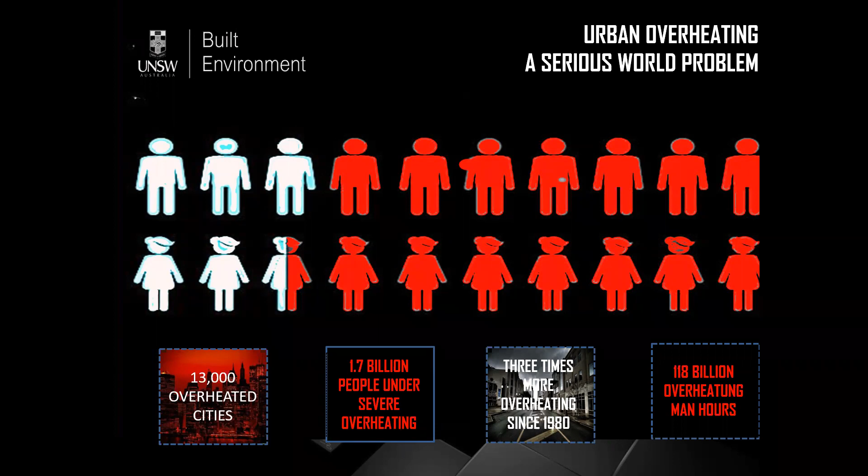Regional climatic change together with global climatic change are among the most important environmental problems we are facing today. What is urban overheating? It has to do with the higher temperatures in specific parts of the city, usually in the areas with higher density, higher anthropogenic heat, and higher solar radiation absorbed and stored there. This is a very documented phenomenon - the most documented phenomenon of climatic change.

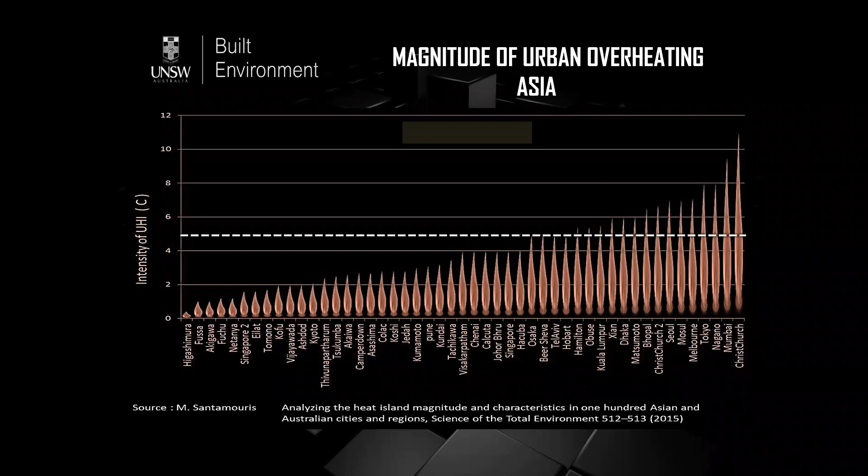Do we have enough evidence and proofs about regional climatic change? Of course. There are more than 450 cities where experimental data are available. I'd like to show you data from Asia and Australia, where you can see that the average magnitude of urban overheating is close to 5 degrees, but there are cities which present an overheating magnitude over 10 degrees. So it is a very well documented phenomenon.

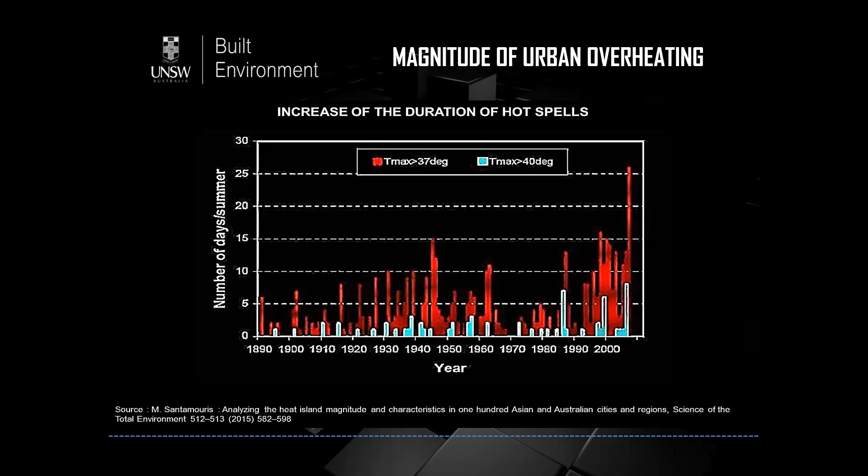Unfortunately, it's not just the increase of the temperature in our cities - it is much more than that. It has to do also with the increase of the duration of hot spells. If we try to plot the hot spells above 37 degrees, the red bars, or above 40 degrees, very serious hot spells, the blue bars, you will see that during the very last years, there is a tremendous increase of the hot spells. But it's not just the increase of temperature and duration of hot spells - unfortunately it's more than that.

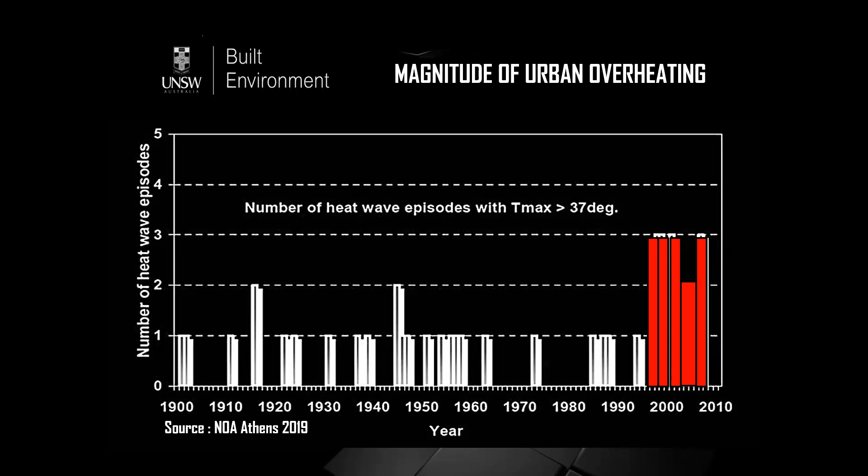It has to do also with the increase of the magnitude and frequency of urban overheating. If we plot, for example, the number of heat waves with temperatures above 37 degrees during the last 100, 120 years, you will see that during the very last years there's a tremendous increase of the frequency and also the magnitude of heat waves. So urban climatic change has to do with the increase of temperature in our cities, the increase of the duration of hot spells, and also the increase of the magnitude and frequency of heat waves.

Once this is defined, then we really have to understand the characteristics of urban overheating.

It's not so simple. You can say, for example, that the temperature in the city is 5-6 degrees higher than in the surrounding, but this is not enough really to understand the science and the engineering of the problem and propose solutions. So we need really to go in depth, understand the phenomena, and at the same time have a very good knowledge and plan all possible solutions to face the problem.

This can be done through experimental techniques or through numerical techniques. Numerical techniques, which have been developed really during the very last years, for example mesoscale modeling, allow us to have a very good understanding.

Once we understand the reasons and the characteristics of urban heat island, then we can plan our solutions and our response to the problem. If we don't understand it and we face the problem, or plan based on empirical knowledge, I'm afraid that we don't have results.

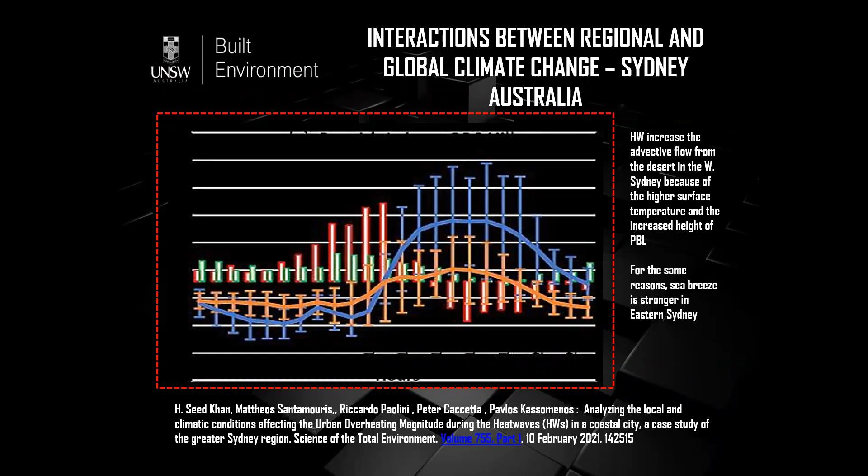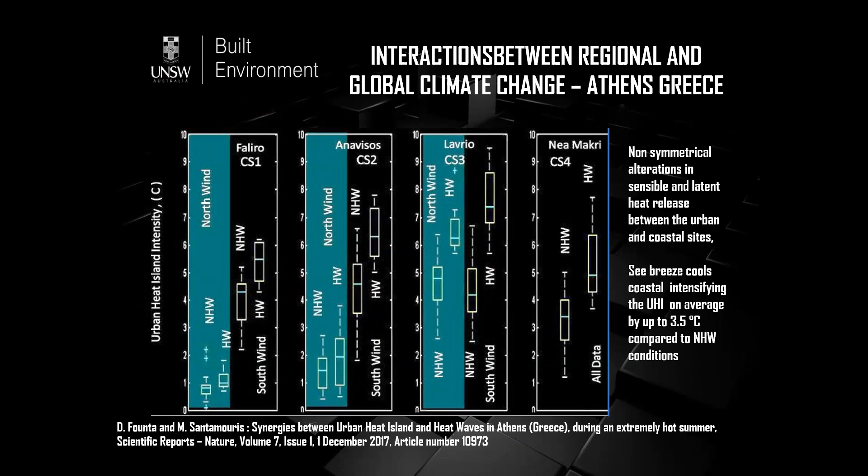The same happens, for example, in Athens, Greece. You can see the magnitude of the urban heat island in specific parts of the city during the non-heat waves and during the heat wave. You can understand that it is much, much higher during the period of heat waves. So this is a serious problem, given that we expect a tremendous increase of the frequency and also of the magnitude of heat waves in the future.

What about the impact? Of course, higher temperatures in our cities may have a very specific impact on energy, may increase the energy consumption for cooling, for example, may create a serious problem on thermal comfort, may increase the concentration of pollutants, may have an impact on health, heat-related mortality and morbidity, may affect the economy or the sustainability and vulnerability of the population.

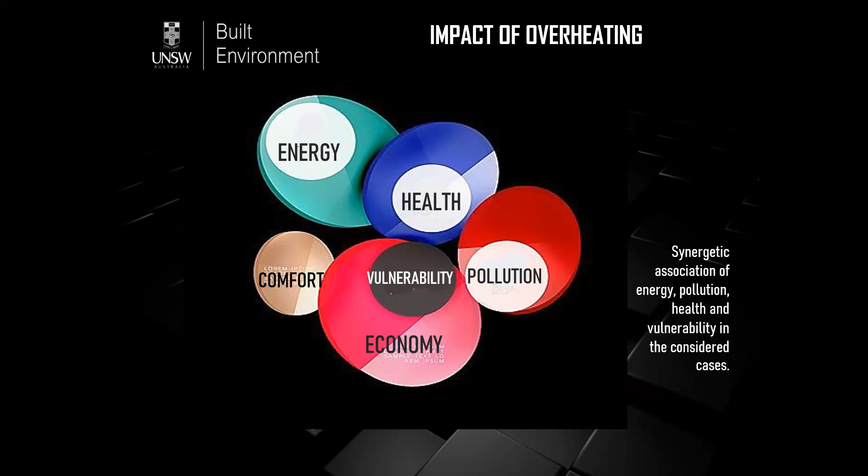Do we have enough evidence and knowledge about the real impact? Yes. During the last 10, 15 years, we have collected a lot of real experimental data that document really the impact of urban overheating on our life.

Let's start with energy. Urban overheating is affecting really the energy supply and the energy demand. How is it affecting the energy demand? It is evident: higher temperature means higher demand for cooling. And this means, of course, that perhaps we may have less energy for heating, which is not exactly the case.

On the other hand, urban overheating is affecting very much the energy supply. Why? Because it increases the peak electricity demand. So it obliges utilities to build additional power plants to satisfy the additional demand during some days or some weeks per year. This increases tremendously the cost of electricity, because power plants have to operate just for some days per year, and this means that they have to be maintained during the whole year, which increases the cost.

On the other hand, we have a lot of power disruptions. We have higher demand during the peaks. We have increased losses and many other things.

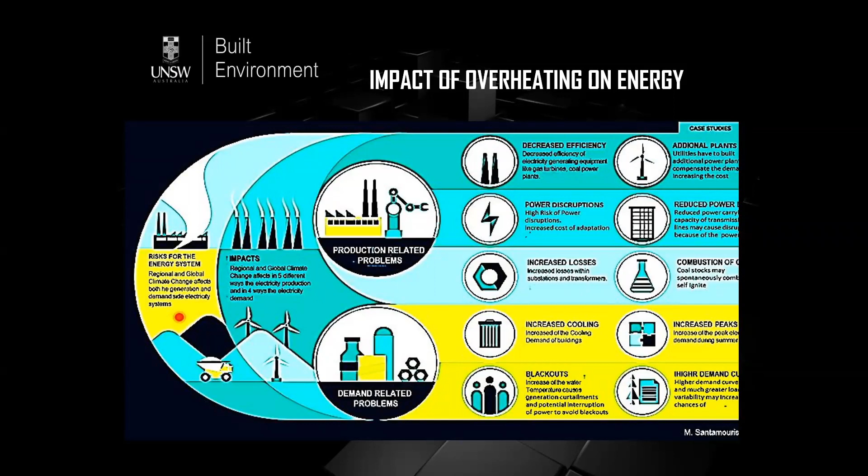Let's try to be a little bit more quantitative. Do we know how much is the energy increase because of the urban heat island? Yes. By collecting data from more than 100 cities around the world, the average energy penalty per square meter of cities is close to 2.3 kilowatt hours per square meter. Or if you like, the energy penalty per square meter of city and per degree of temperature increase is 0.7 kilowatt hours per degree and square meter.

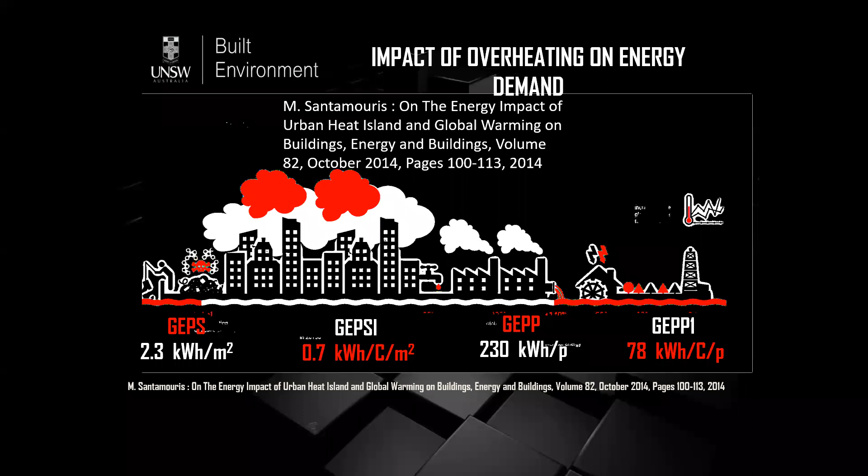If you like to report it per person, it is close to 230 kilowatt hours per person per year. And if you report it per person and degree of temperature increase, it is 78 kilowatt hours per degree and person. Of course these values may change from city to city, but these are the average values we have collected.

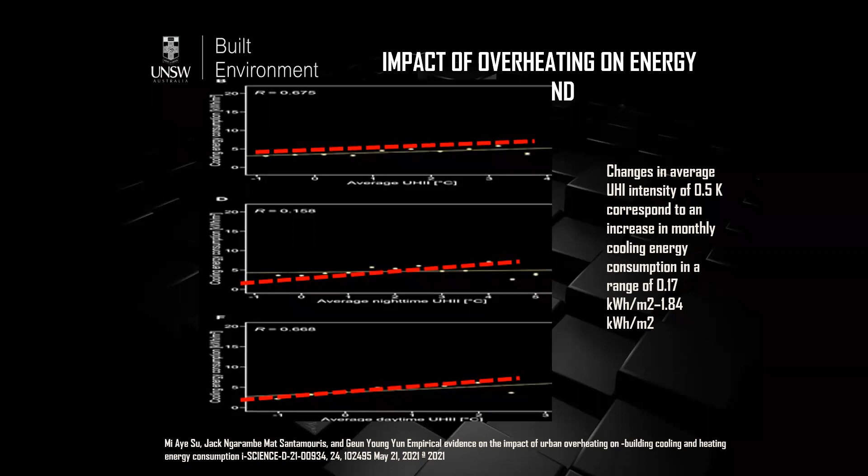A very recent study we performed together with colleagues in Korea, following this lecture, looked at the real energy consumption of buildings associated with real overheating in Seoul. It showed that because of the overheating, the energy consumption for cooling was up to 1.8 kilowatt hours per square meter higher than other buildings. So there is a very important penalty imposed on our buildings because of urban overheating.

This brings us to the major problem we may face in the future: the energy consumption for cooling. How much is the energy consumption for cooling in our days? Very low, not so high. Heating is the main energy consumption.

But what about the future? Which are the drivers that increase energy consumption? First, the increase of temperature. Second, the increase of population. Third, the tendency to increase floor area per person. We also have to consider that in the future we may have air conditioners of higher efficiency, and also buildings of higher efficiency.

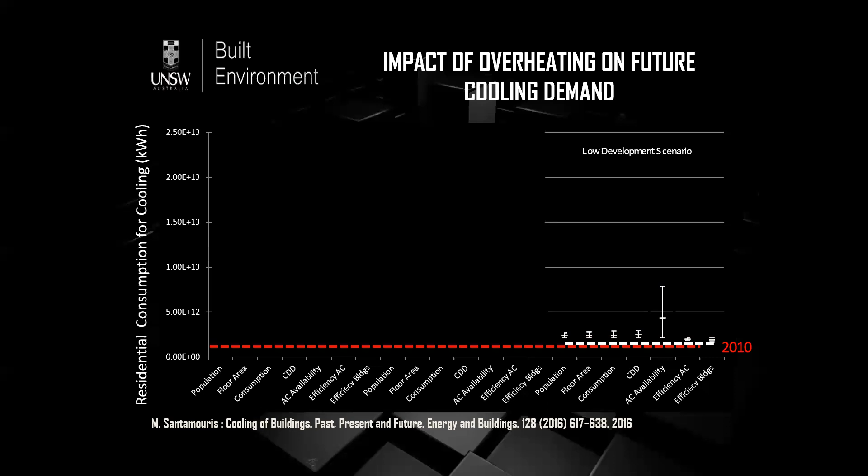When all these parameters are taken into account, considering a low development scenario for 2050, the increase of cooling demand will be on the order of 320%. But once we consider an average development scenario, which is more probable, the increase of cooling demand will be as high as 750% compared to 2010.

In case we have a very high development scenario, the increase will be on the order of 2,270%. When uncertainties are taken into account, these numbers really skyrocket, and we may have a tremendous energy increase for cooling. According to recent studies, just one city, Mumbai in India, may present in 2050 higher energy consumption for cooling than the whole United States.

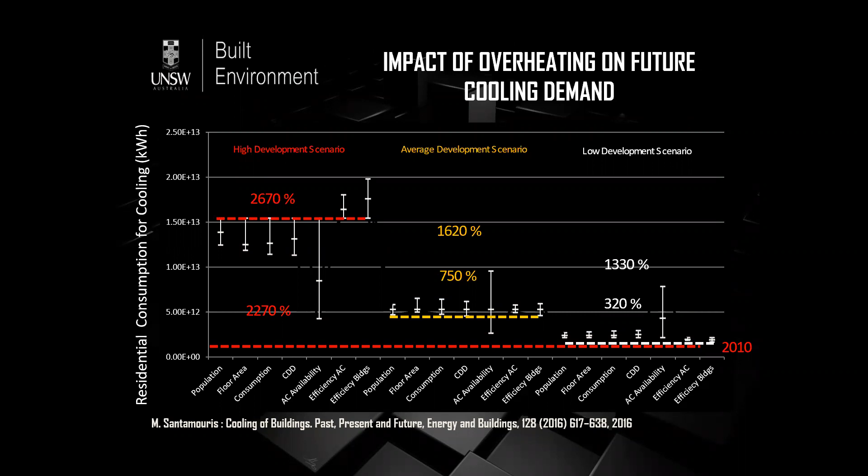You understand the implications associated with such a high demand for cooling: which kind of sources we will use, how many new power plants, which kind of fuels we will use, what about pollution, what about emissions, what about the cost, and all these specific issues.

Apart from the energy impact of urban overheating, higher temperatures in our cities have a serious impact on air pollution, mainly on the concentration of atmospheric ozone. Ground level ozone is a toxic gas, a killer. Almost 87% of episodes of high ozone concentration are because of urban overheating.

We know it's accepted to live under 110 units of ozone, which in my opinion is quite high. But unfortunately, in our cities we have more than 300 units of ozone, which is very high, three times higher than the threshold.

A recent study collecting data from about 100 Chinese cities showed a tremendous increase of ozone concentration during the last years. Unfortunately, the forecast for the future shows a tremendous increase of ozone because of future developments. This increase may be as high as 400%, I hope not, or as low as 20%, but it will be really high. So a serious problem associated with urban overheating has to do with the concentration of ozone.

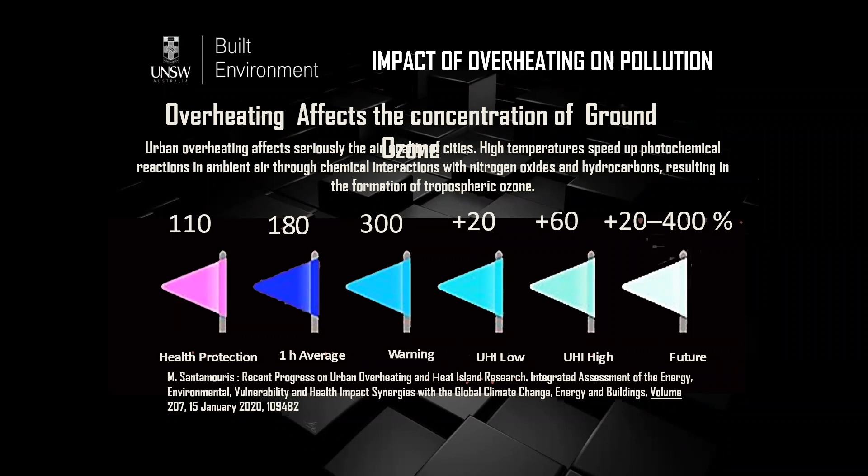But it's not just that. We know very well that during high temperature periods, emissions from power plants, especially thermal power plants, increase by about 3% per degree of temperature increase. So because of the increase of temperature, we have much higher emissions from power plants.

So there is an important impact of urban overheating on energy, and an important impact on environmental quality. But in my opinion, one of the major problems associated with urban overheating has to do with the vulnerable population, low-income population. We know very well that low-income population lives in houses of low quality, not well protected, and because of that, they are the first victims of urban overheating.

Do we have enough studies that show the impact of urban overheating on vulnerable population? Yes. During the very last years, there have been a lot of studies, experimental studies performed.

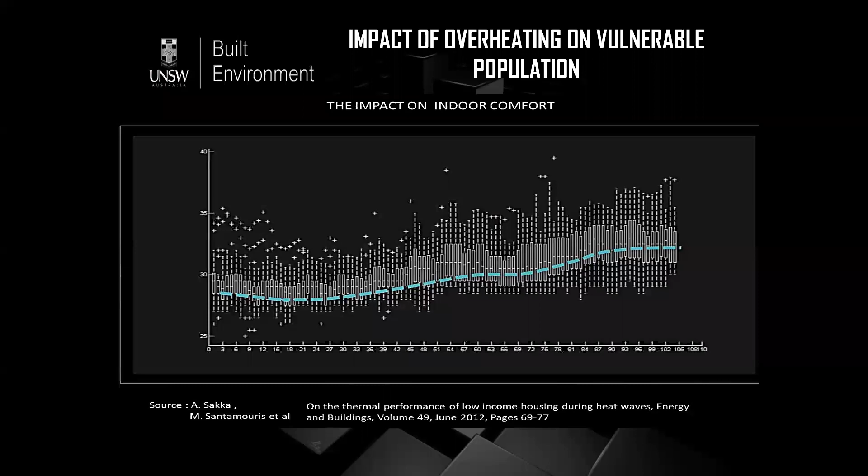I'd like to show you a study we performed 10 years ago in Athens, Greece, involving about 400 low-income houses during a heat wave. You see the evolution of the indoor temperature. Before the heat wave, indoor temperature was about 27 degrees, no problem. At the end of the heat wave, 5 days later, average indoor temperature was 33 degrees. We have more than 3 days with temperature above 35 degrees in many buildings, and many buildings presented temperatures close to 38, 39 degrees.

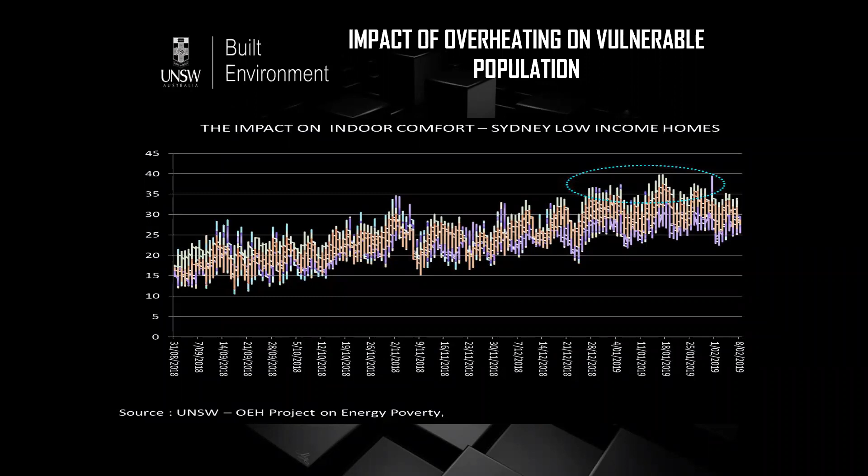This brings us to the more important problem associated with urban overheating: the problem of health. Heat-related mortality increases above the threshold temperature. This is very well known. Is it so simple? No, it is a very complicated relation. It's not a linear or easy deterministic correlation between the threshold temperature and heat-related mortality.

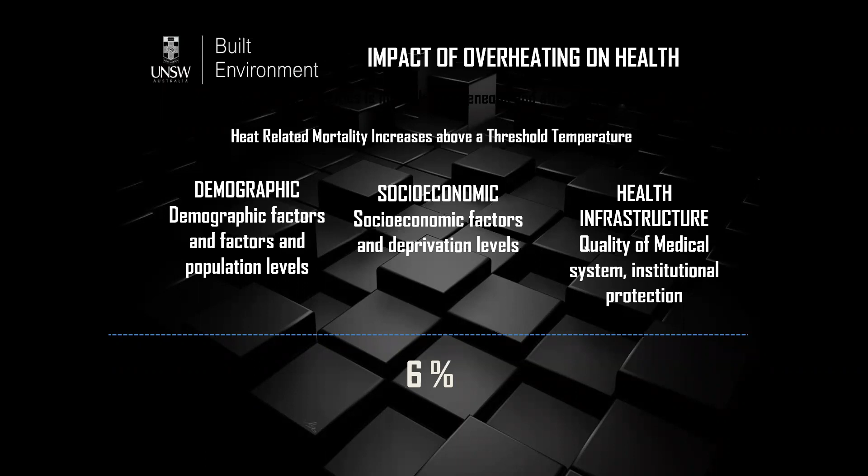Why? This has to do with our adaptation. So all those who say overheating is good for us in the north because we may have higher temperatures don't really take into account that this may affect mortality and health problems in the area.

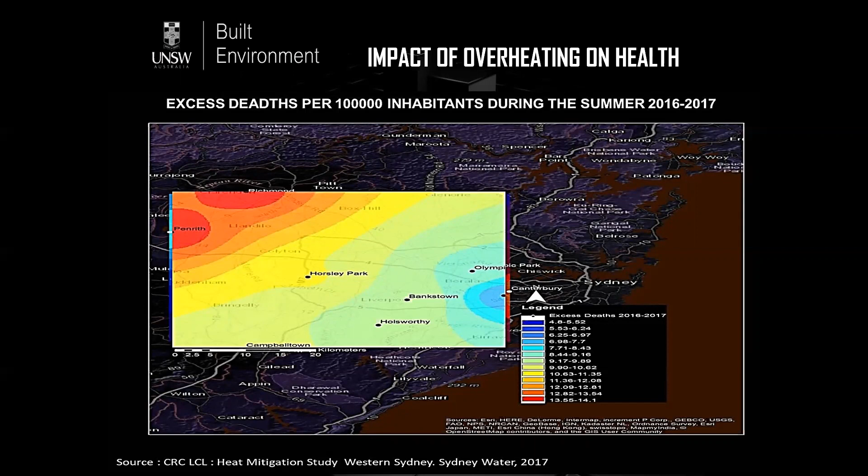What happens in Sydney, for example? We have performed studies trying to associate heat-related mortality with overheating in Sydney. I'd like to show you the distribution of heat-related mortality in the city of Sydney during the period of 2016-17, where we had more data. You can see that in the northwestern part of the city, where temperature during summer is up to 9 degrees higher than in the eastern, coastal part of the city, heat-related mortality per 100,000 people is almost 3 times higher than in the coastal area. So there's a tremendous increase of mortality, a tremendous penalty imposed on the local population because of heat-related mortality.

But it's not just the outdoor environment that affects mortality; it also has to do with the quality of the indoor environment. A recent study performed in London by UCL showed that while the risk of mortality because of outdoor overheating is 6.1 deaths per million, when this is associated with low quality of the indoor environment, it increases by a factor of 4, up to 23.5. So once we really discuss and study the problem of overheating on health, we have to consider, in parallel and in a combined way, the quality of both the outdoor and the indoor environment.

This was the second part: what happens regarding the impact of urban overheating on energy, environment, survivability, and health. These are the bad news. Do we have good news? Yes. During the last 10 to 15 years, we have made tremendous progress regarding mitigation.

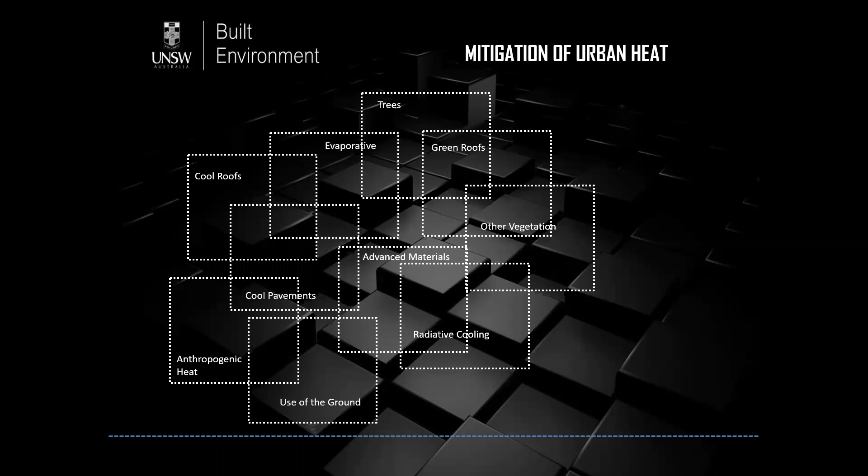We have made tremendous progress in developing technologies and knowledge to decrease the temperature of our cities. We have developed a lot of new technologies, for example evaporative cool roofs, vegetation, and many new mitigation strategies that have been implemented and tested in many cities. So we have a lot of knowledge about the efficiency of these mitigation technologies.

I will concentrate on two specific technologies: mainly the use of materials, and second, the use of greenery.

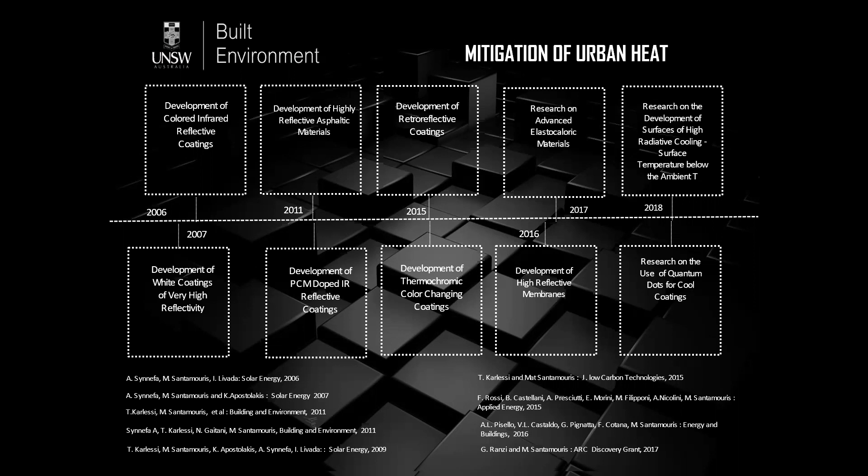During the very last years, regarding materials, there has been development and implementation of materials in cities which may decrease the temperature of the urban environment, and these materials really contribute tremendously to decreasing the temperature. I'd like to present the progress we have made regarding these materials.

But before presenting the efficiency and characteristics of these materials, I'd like to tell you that in very recent years we have made tremendous progress in understanding and documenting urban overheating. We have new techniques using UAVs, drones, and many other techniques to map urban overheating.

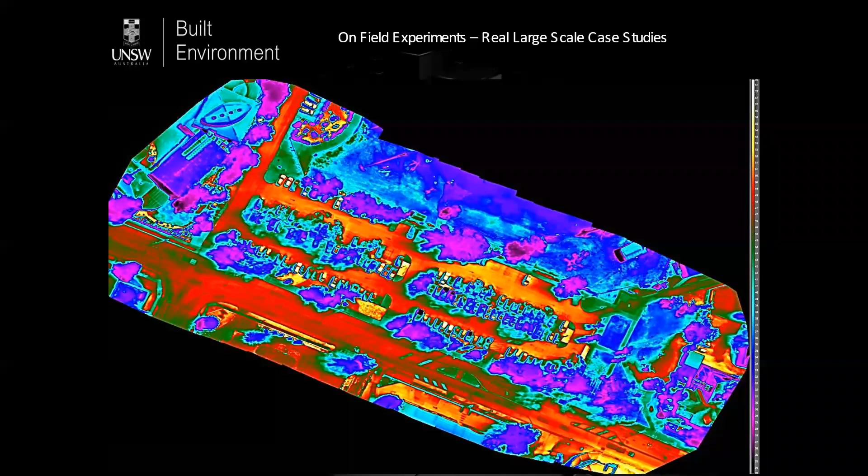For example, you see a picture of the urban overheating surface temperature in the city of Alice Springs in Australia. This is a resolution of 5 centimeters by 5 centimeters, collected by our specific drone. So we know, by collecting this information, where we have to intervene, and we can avoid horizontal actions that may increase the cost and decrease the efficiency.

Also, we know exactly, and we can convince, using these videos, graphs, and figures, all the decision managers and decision makers where they have to interact. So we can document our work. This is a tremendous development.

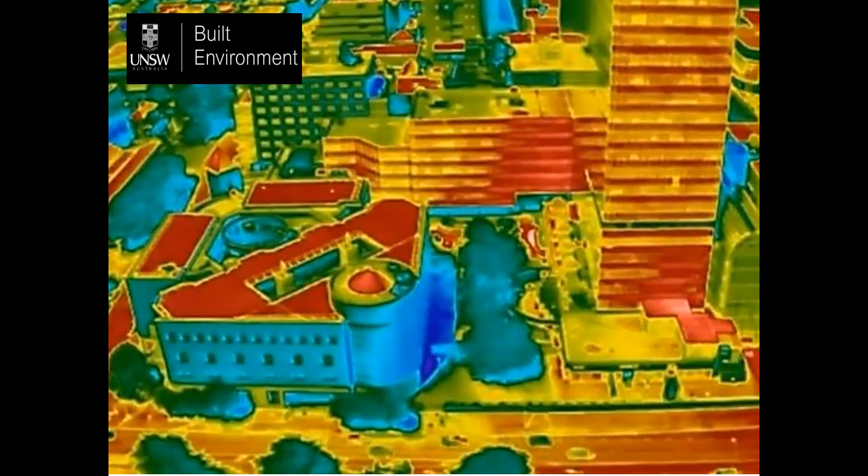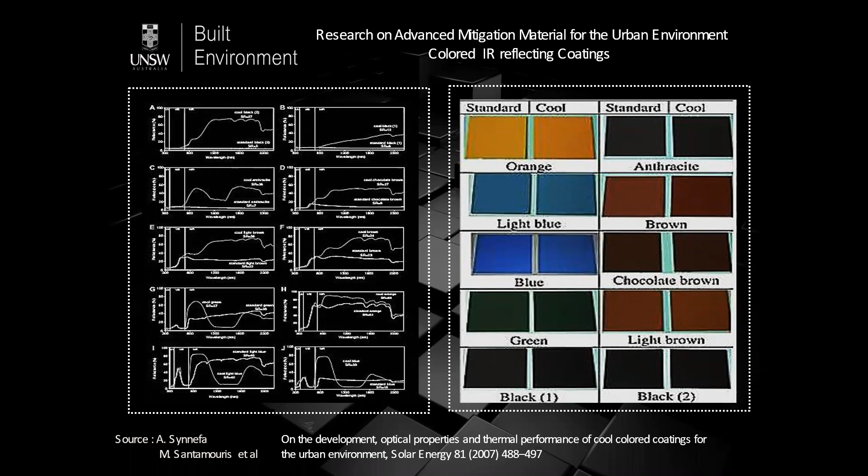These materials are really commercialized, available all over the world, and we know, as you see for example in some pictures, they present up to 15 degrees lower surface temperature than conventional materials of the same color.

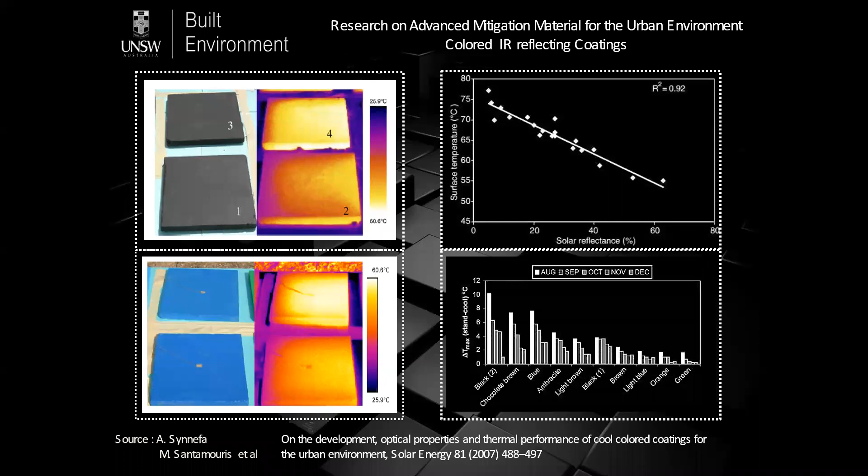Are these materials available, and do we have enough evidence about their performance? Yes. As I mentioned before, there are more than 150 companies all around the world that commercialize these highly efficient materials. Through a study we performed for the Department of Industry here in Australia, we calculated the efficiency, or the potential of mitigation, in the 5 major cities of Australia: Sydney, Melbourne, Brisbane, Adelaide, and Perth.

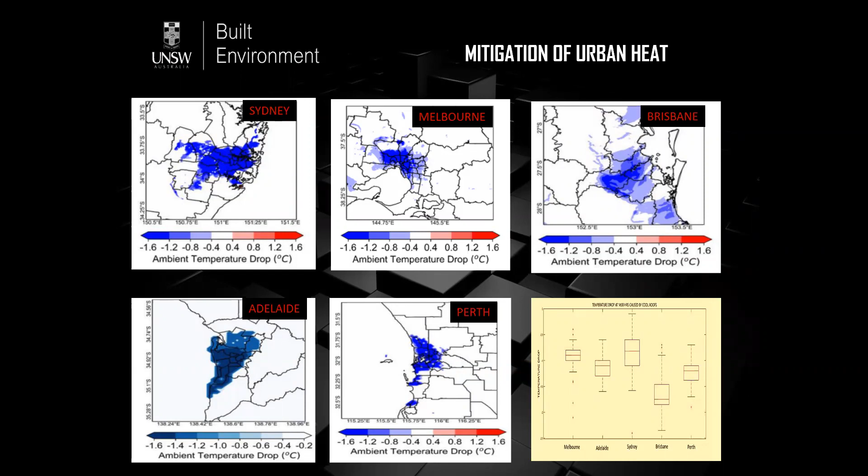As you can see from these graphs, during the peak summer period, 2 o'clock in the afternoon, by using cool roofs - materials of higher reflectivity just on our roofs, not the pavement - we may decrease the peak temperature by up to 1.5 degrees, and in some cases, for example Brisbane, up to 1.8 degrees. This is a tremendous potential for mitigation.

But this was developed 15 years ago. This is something well known, with more than 400 applications around the world. What about the newest developments?

The use of thermochromic materials - materials that can change color as a function of temperature - is something that has been studied many times. These materials may be of any color during the winter period, absorbing heat, because we may wish to have absorption of heat during the winter, and become white or any other color during the summer period, so they become reflective.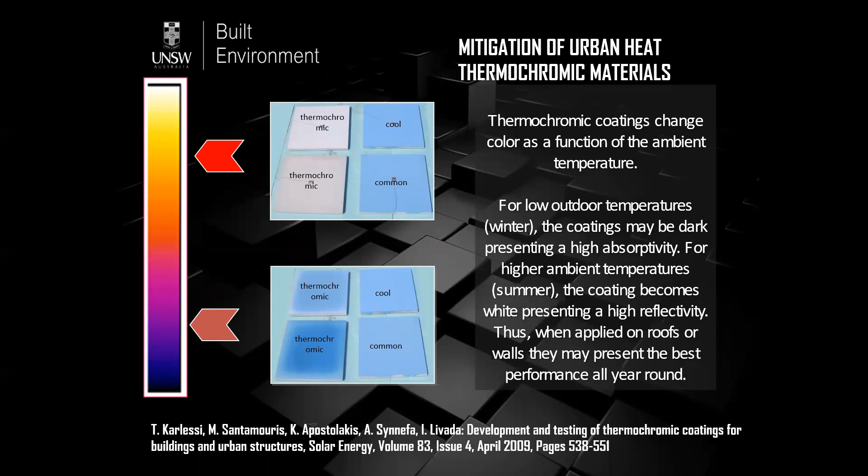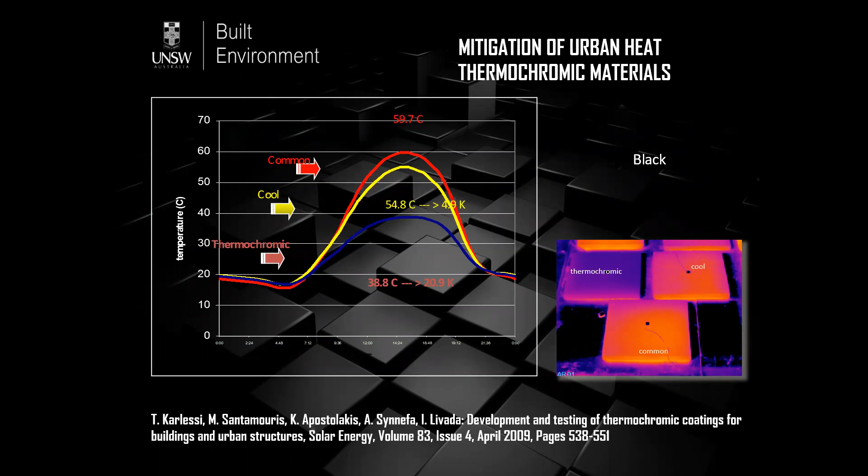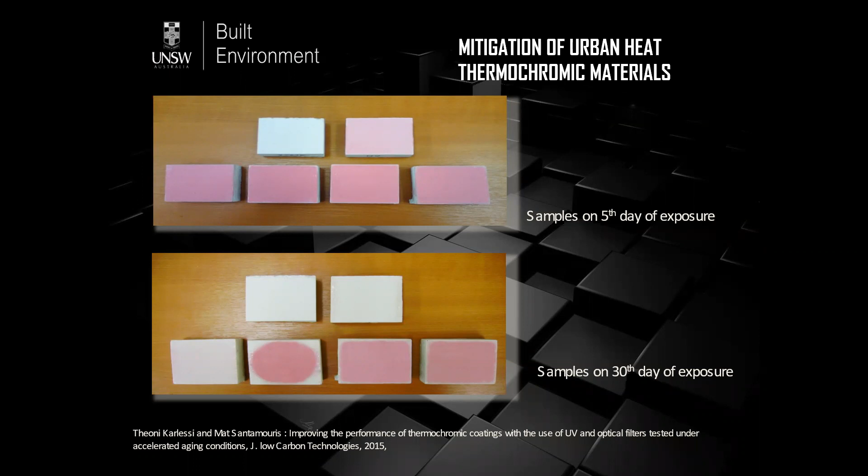The main problem of thermochromic materials is that they present very serious optical degradation - after 5 to 6 months they lose their ability to change color. So we have concentrated on developing methodologies to improve their aging efficiency, and by using some optical filters, we have succeeded in extending the optical performance of these materials up to 3 or 4 years.

These materials are now almost commercialized, and I expect in the near future they'll be in the market. However, there is tremendous potential in thermochromic materials, materials that change color, once we're using photonic crystals and plasmonic materials. Some of them are based on temperature-sensitive physical or optical property variation, and may change color without having problems of photodegradation.

There is a lot of research on this, and we expect that in the near future we may have thermochromic materials based on photonic and plasmonic crystals which do not present any problem of aging.

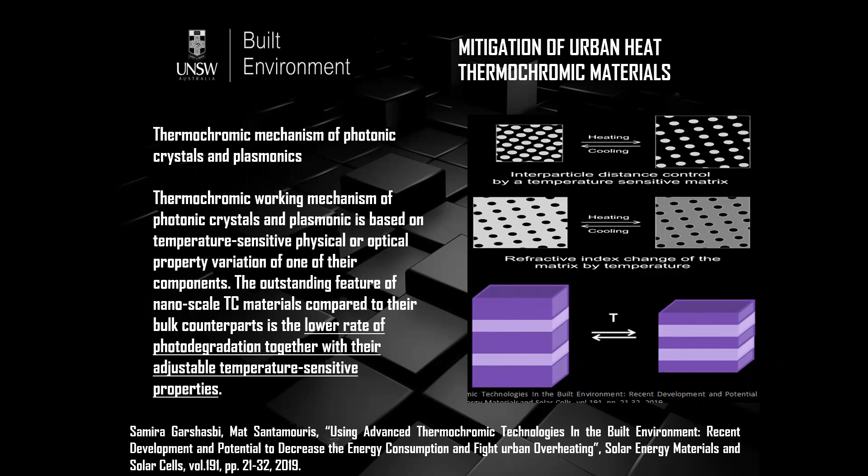However, the real revolution in terms of building materials for mitigation has to do with the so-called radiative cooling materials, photonic materials. These materials present a very high reflectivity in the solar spectrum, 96 to 97%, but they present a very high emissivity in the so-called atmospheric window, 8 to 13 microns.

The atmospheric window is a part of the atmosphere where radiation coming from the Earth is not absorbed—the atmosphere is transparent there—and radiation emitted at this wavelength may escape to space. By developing materials with very high reflectivity and very high emissivity in the atmospheric window, we don't absorb the heat, and we send the excess heat to space instead of sending it to the atmosphere and having it return back.

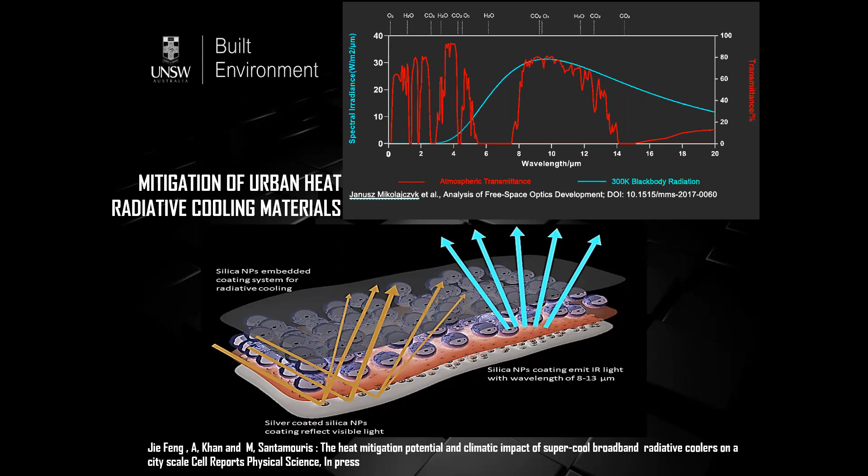These materials, which represent a high revolution during the very last years, are being developed now, and some of them are commercially available.

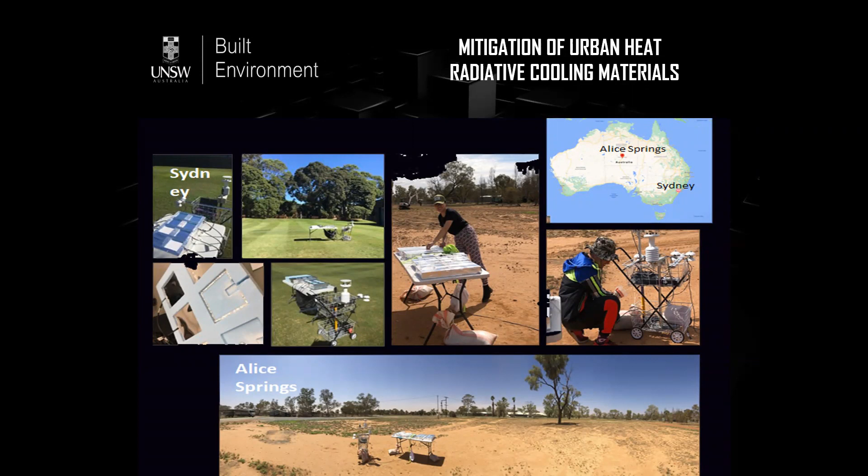I'd like to show you the development we achieved here at UNSW during last summer in Alice Springs, in the Australian desert. Temperature was about 40 degrees, solar radiation was about 1,100 watts. These materials presented results of about 15 to 20 degrees lower surface temperature than the ambient one.

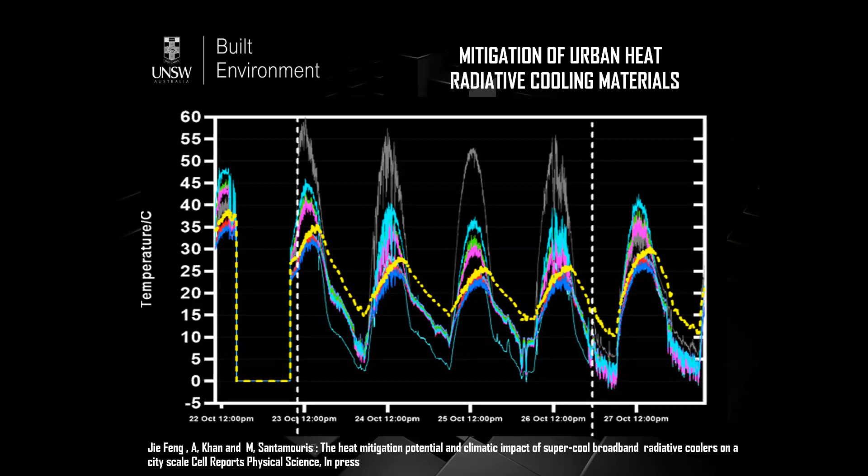These are materials of natural air conditioning. Imagine you have a material which presents 15 to 20 degrees lower surface temperature than the ambient temperature. These materials present a tremendous potential for cooling and mitigation in our cities.

Do we have enough applications? We started a very big application in Riyadh, Saudi Arabia, where we are responsible for the whole mitigation project of the city. By using these super cool materials, as they are known, we may decrease the peak temperature of the city by up to 4 degrees. This is very important—this is a tremendous potential.

These are the advantages of supercool materials. Unfortunately, when these materials are applied in heating and cooling dominated climates—cities which need both heating and cooling—we may have a problem of overcooling during winter. And we don't like this; we don't like to increase the heating demand of our cities.

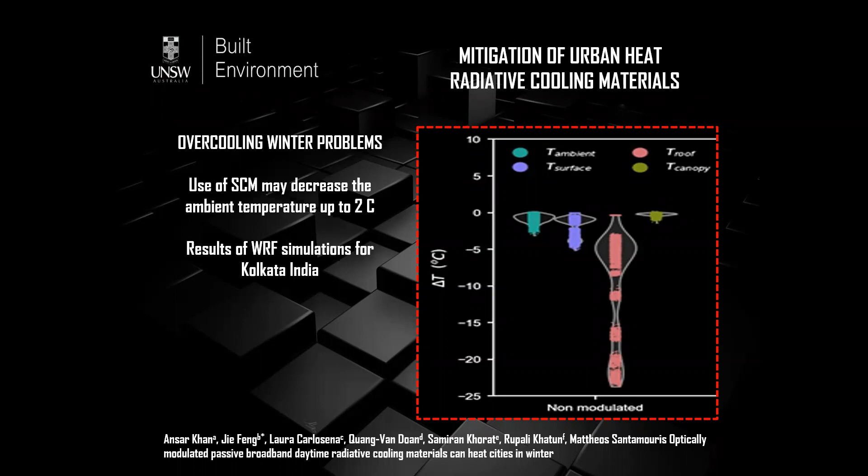To face this problem, we have developed some modulation techniques. We developed materials which have very high reflectance during the summer period, but during the winter period the reflectance decreases to up to 10%, so they absorb instead. Also during summer these materials present very high emissivity to the atmospheric window, but during winter the emissivity becomes very low. So these materials are very much adapted to local conditions.

By using these modulation techniques, we may decrease the peak temperature of cities during summer by up to 4 or 5 degrees, and at the same time increase the temperature of cities by up to 2 degrees during winter. So these materials are win-win for our cities. Photonic materials combined with advanced modulation techniques may be the future for our cities.

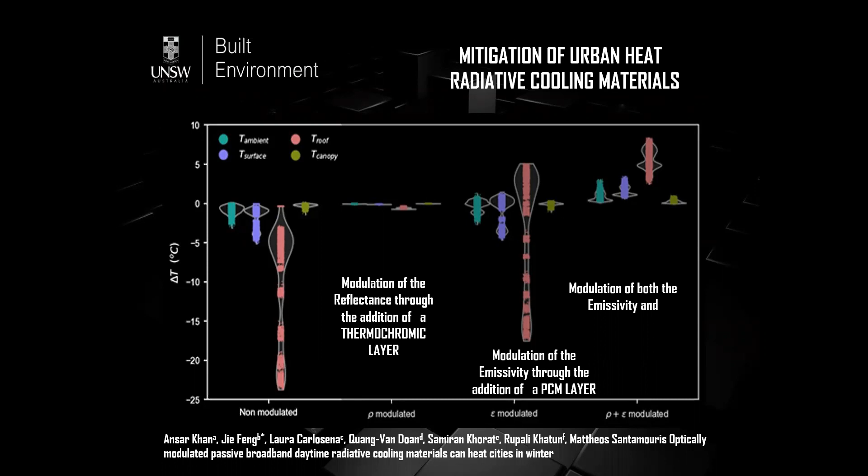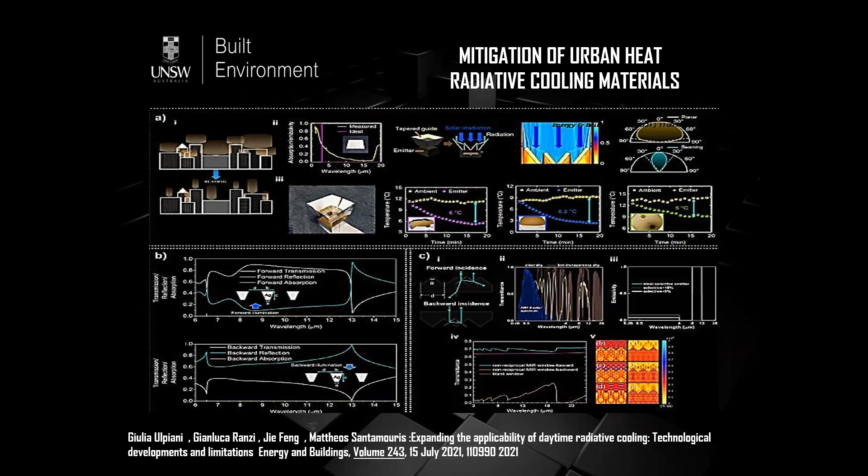We try to improve these materials using advanced techniques in order to further improve their performance, and we are testing different technologies to decrease the cost. The cost is not so high, but at the same time we really want to improve their efficiency.

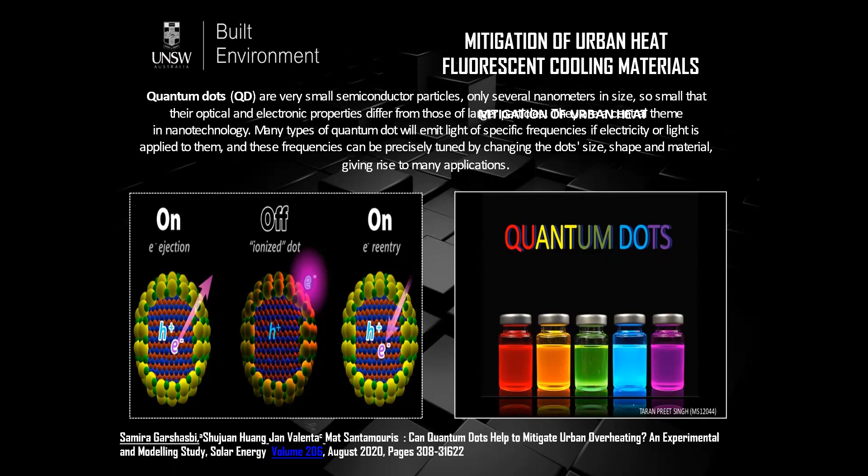A third technology I'd like to show you has to do with the use of fluorescent cooling materials. Quantum dots, very small semiconductor particles, present something very important: in reality, they do not absorb heat. While every material absorbs heat when radiation falls on it, in quantum dots the radiation is absorbed but immediately re-emitted as fluorescent radiation. The energy balance of the material is very close to zero, so these materials present very high efficiency for mitigation.

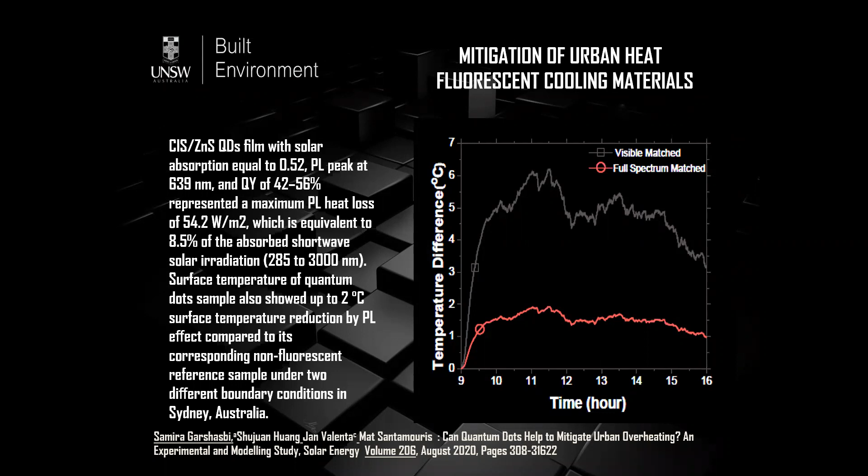We have tested all these materials and developed initially some mitigation products for cities using just fluorescent techniques. We achieved a temperature decrease of up to 2 degrees, which is not so high. At a later phase, when we combined it with cool techniques, meaning infrared reflective materials, we succeeded in decreasing the surface temperature of the materials up to 10 degrees. So these materials present really a very high efficiency for mitigation.

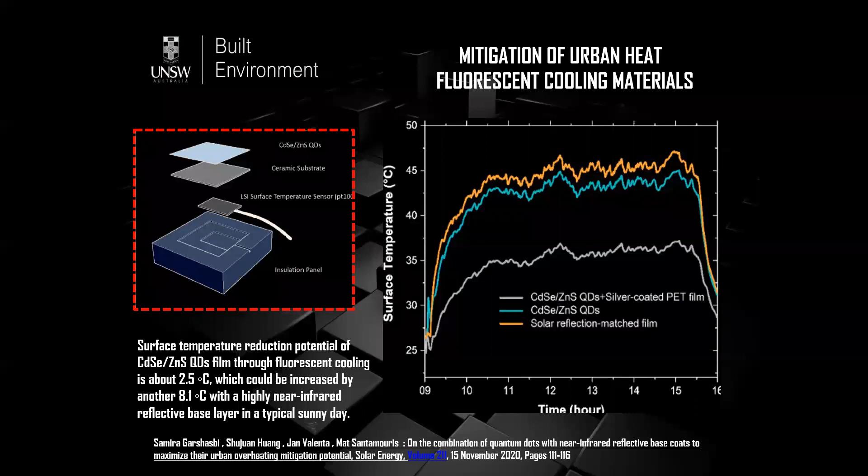We expect that the use of a new family of materials, anti-Stokes materials, which emit more than what they absorb - yes, it is possible to emit more than what is absorbed, so they have a negative balance - will help further. Our calculations show these materials may decrease their surface temperature up to 35 degrees below the ambient one. So there's tremendous potential there. We have a research project and we're working on it.

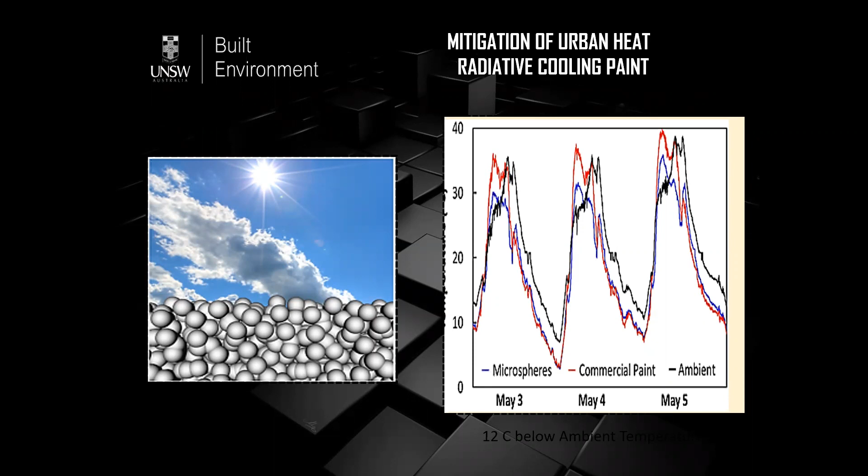For practical applications, we are working together with a big Australian coatings company developing coatings and paints based on radiative cooling techniques. According to our fresh data and simulations, we may decrease the surface temperature of the materials or building structures up to 12 degrees. There are many other such products also in the market, especially in the United States. These are very cheap materials that may help tremendously to decrease the temperature of our cities.

A second problem associated with the use of photonic materials is that they present very high reflectivity, 97%. So these materials cannot be used on vertical facades - they may create glare and contrast. You cannot have these materials on streets or pavements. So what about developing colored materials, low reflectivity materials with no problems of glare, but of high efficiency?

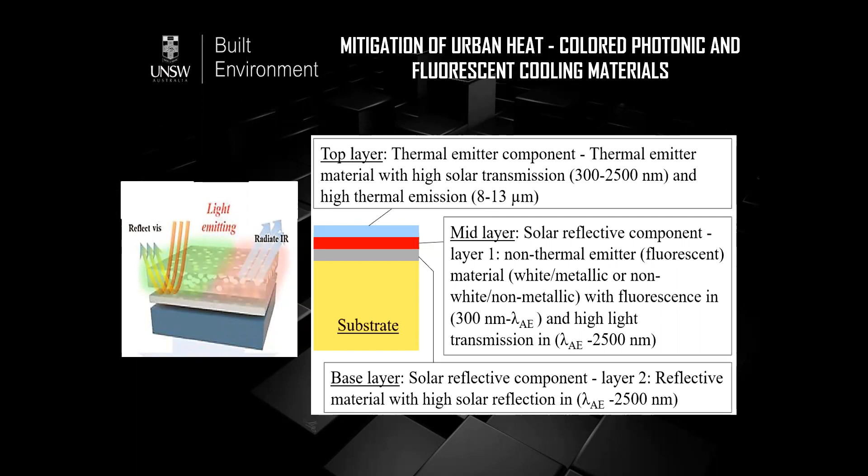What we're developing now, in a very big project, is colored infrared photonic materials, which present low reflectivity but emit most of the radiation through fluorescence. It's a combination between photonic and fluorescent materials. These materials may present a low emissivity, a low reflectivity, a high emissivity, and a high fluorescence - so we substitute the cooling effect of high reflectance with the high emission of fluorescent radiation. In this case we may have very high efficiency. These materials are not yet developed; we work on it and expect that during next year we will have all these materials ready.

What is the state of the art regarding the temperature decrease because of photonic materials? Actually, from existing applications we have up to 15 degrees lower surface temperature, which is tremendous - it's a natural air conditioning. Under specific conditions, with no convection, they have achieved in the United States a decrease of surface temperature up to 40 degrees below the ambient temperature. We don't need that in the built environment because there would be other problems. But 15 degrees below ambient temperature, combined with modulation techniques to avoid overcooling in winter, is really a fantastic solution.

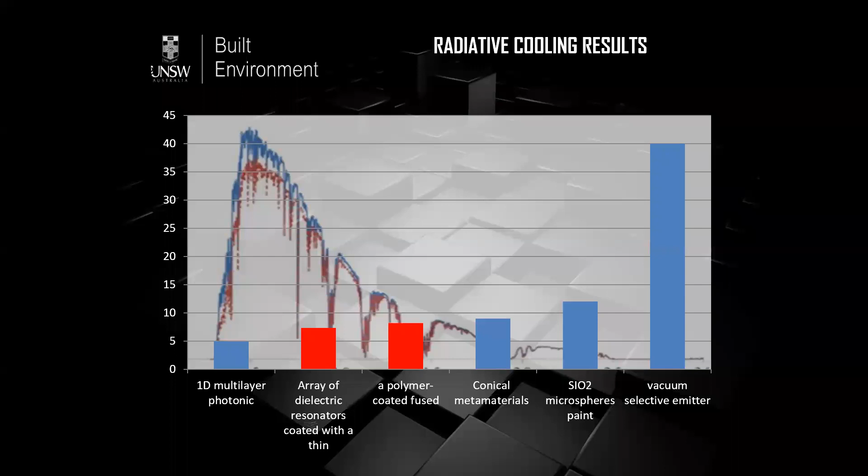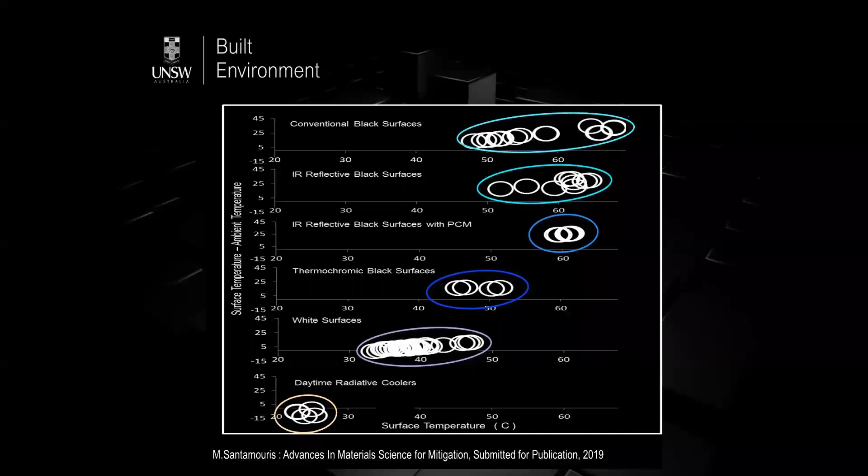So to conclude about materials: looking at the history of building materials in the built environment, we started some years ago with normal conventional materials presenting this type of temperature - these are experimental data. Gradually we decreased the temperature, and we are now at a level where we are able to decrease the surface temperature of our cities up to 15 degrees below the ambient temperature. This may have a tremendous impact on the temperature. Once these techniques are developed, we may implement a serious decrease of the temperature.

Let's move to the second important technology, or technique, for mitigation: the use of greenery, of urban greenery. If we increase the green infrastructure of our cities, we may have a lot of benefits - we may decrease the temperature and many, many other benefits.

Do we have enough knowledge about the impact of greenery in our cities?

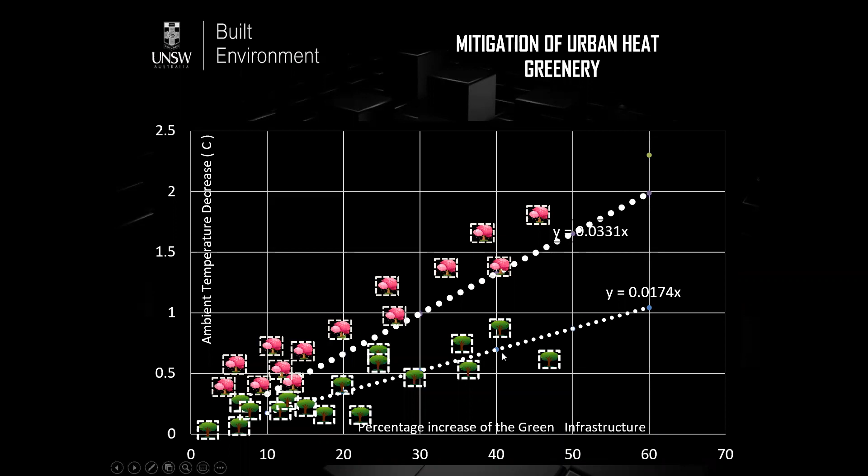I can explain why, but we don't have the time. Another issue to consider, once greenery is proposed as one of the solutions in cities, is that vegetation presents a decrease of evapotranspiration, or even zero evapotranspiration, above a threshold ambient temperature. Why? Because trees like to keep their sap, so they stop evapotranspiration and don't contribute to cooling anymore. And because their leaves are dark green, they may present higher temperature than the ambient one and contribute to heating.

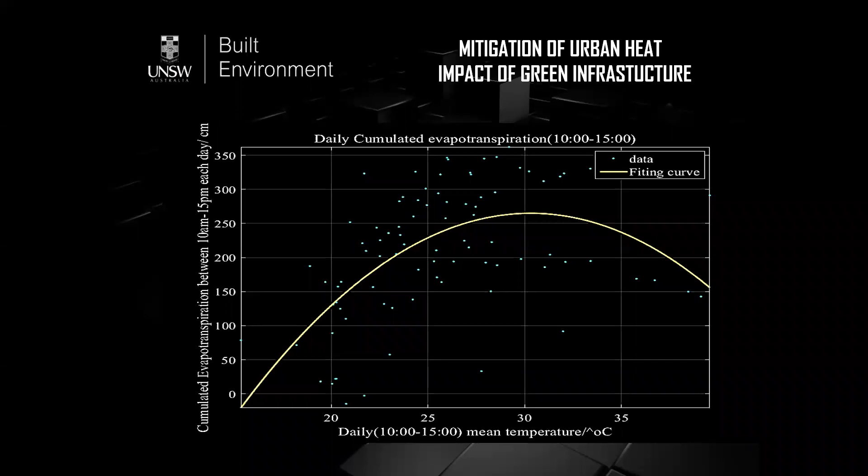This is the reason that in many urban parks, during heat waves, the temperature is higher than outside the parks. These are results of a study we performed experimentally here in Sydney with eucalyptus trees. You can see that above 30, 31 degrees, the evapotranspiration of the trees has decreased tremendously, almost to zero.

Another important issue with greenery has to do with the BVOCs emitted by some plants. We have seen that by increasing green infrastructure in some cities, without taking into account the type of trees used, we may have a very serious increase in the concentration of pollutants, and a very serious increase in ozone concentration.

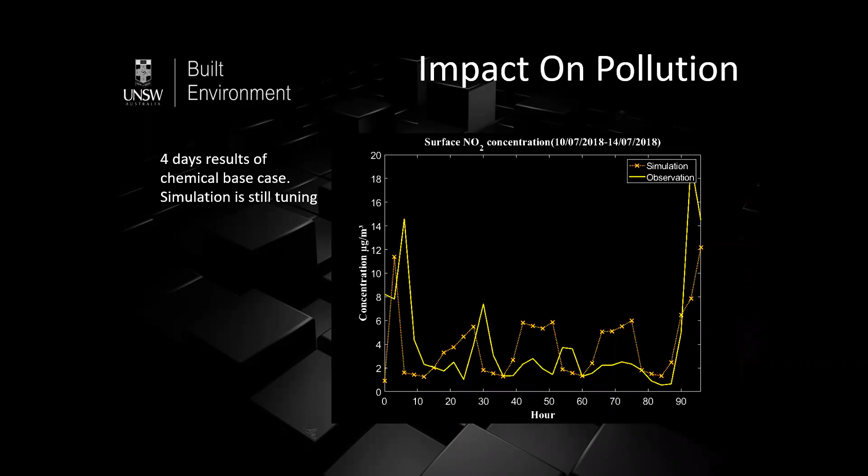Also, we have to consider the use of water. In many cities, especially dry cities, the use of non-irrigated vegetation may increase the temperature. This was the case of Los Angeles, and it's also the case of Riyadh.

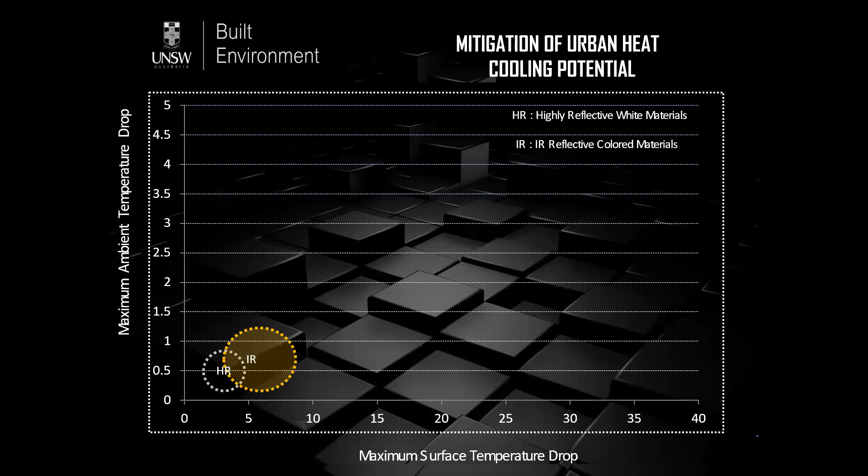So where are we? 20 years ago, we started with reflective materials, white reflective materials, and succeeded in decreasing the temperature by up to 0.5 degrees. Later, by using infrared reflective materials, we decreased temperature by up to 0.7, 0.8 degrees. Gradually, the materials I presented, photonic materials, fluorescent materials, etc., have contributed to decreasing the temperature of our cities by up to 2.5 degrees, and decreasing surface temperature by up to 15 degrees. Now there are more than 150, maybe 200, large-scale mitigation projects around the world.

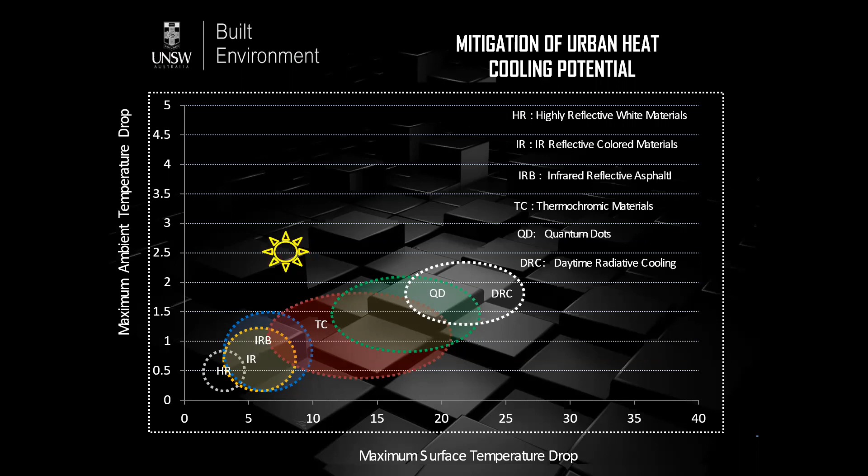Where the peak temperature has been decreased by 2.5 degrees, and we expect that in the near future we'll be able to decrease peak temperature by up to 4 degrees. This may have a tremendous impact on energy demand.

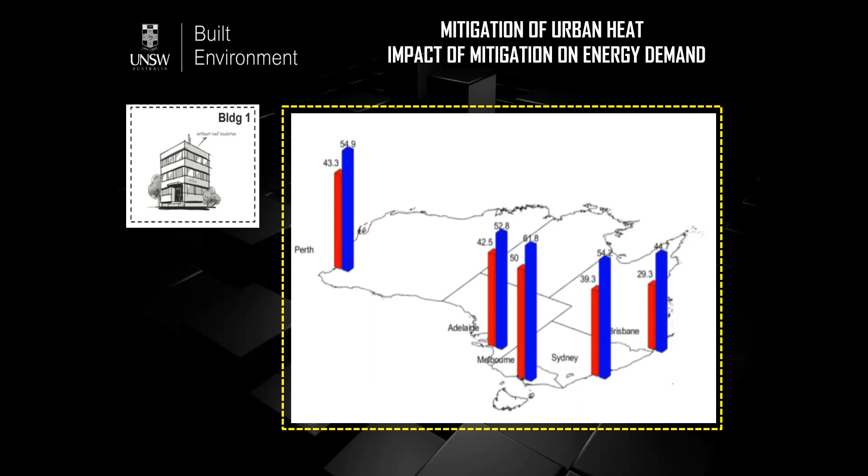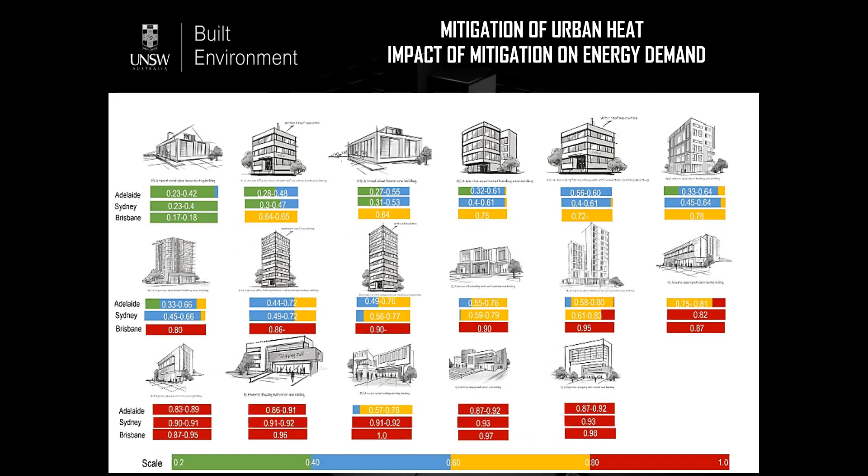The study we performed for the Department of Industry here in Australia shows that for specific types of buildings, for example non-insulated housing or office buildings, the use of cool roofs may decrease the need for cooling by up to 40 or 50%. This is tremendous with such a simple technology. At the same time, it may decrease peak electricity demand in different parts of Australia by up to 20, 25%, which means we need less power plants, less pollution, less emission.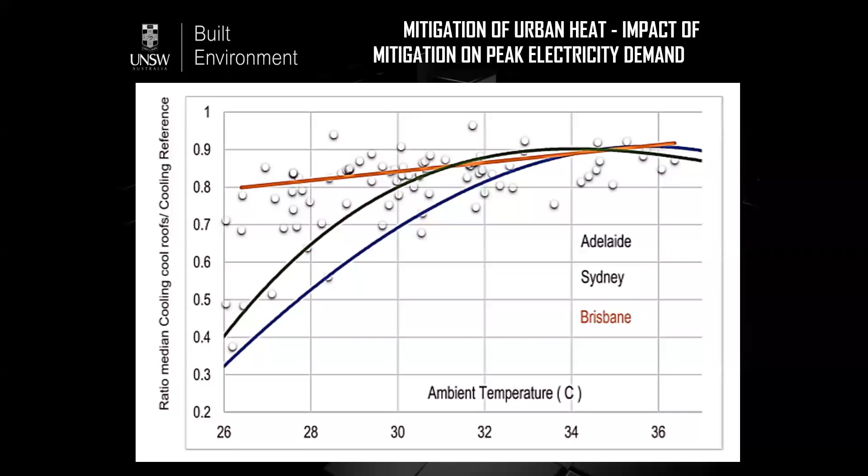This is very clear once we see the curve between ambient temperature and the decrease of peak electricity demand in our cities. You can see that once the temperature is reasonable, 26, 27, 28, up to 30 degrees, the peak electricity demand may decrease by up to 30%, because of the use of cool roofs.

But it's not just that. The use of cool roofs also improves the efficiency of air conditioners. Why? Because we have lower ambient temperature. So our study shows that once we use cool materials in our buildings at the city scale, the total energy benefits may be of the order of magnitude between 50 to 59%.

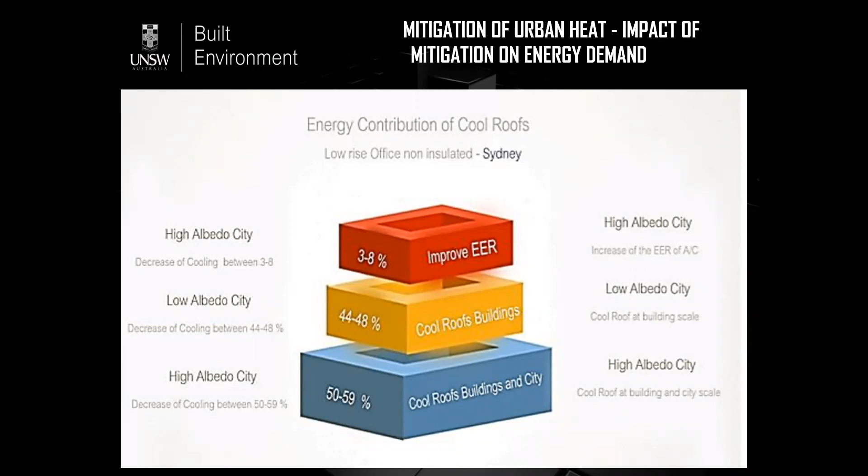At low temperatures, in low albedo cities where we only apply cool roofs at the building scale, the benefits may be of the order of magnitude of 44 to 48%. And the increase in efficiency of air conditioners because of the cool roofs may be of the order of magnitude of 3 to 8%.

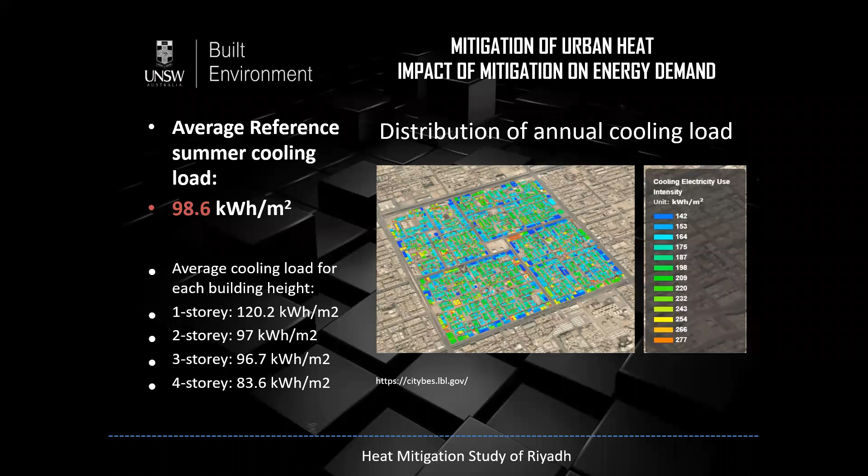Similar data and results have been obtained when we calculated the same thing for the city of Riyadh, together with Berkeley Laboratory, using about 1,300 real buildings in the city center. And the energy consumption savings were really tremendous.

If we try to conclude and look at future scenarios, in Sydney the energy consumption for cooling a traditional house is shown in the red bars, and the yellow one is the heating. By 2050, if we do nothing, the energy consumption for cooling will increase by 3 times without a tremendous decrease of the heating need.

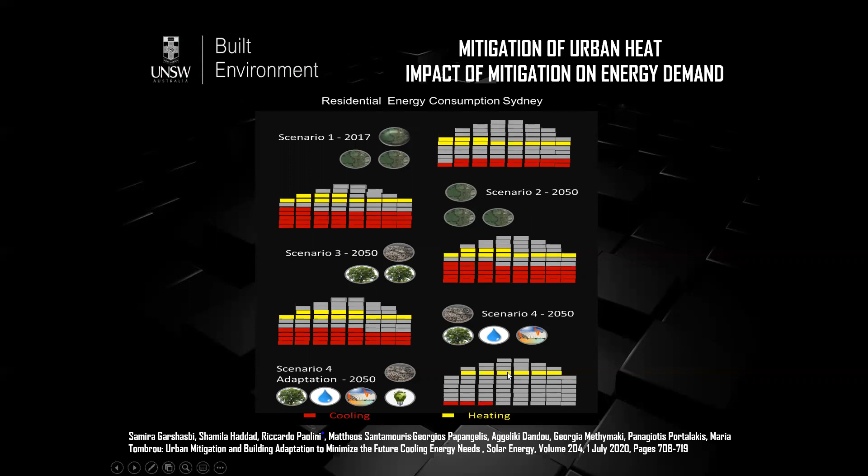If we apply existing mitigation techniques, we may see a very serious decrease of the cooling demand, up to 40%, without an important decrease of the heating. But once we apply combined mitigation and adaptation technologies - a better urban environment with lower temperature together with better buildings - then by 2050 we may almost minimize, despite climate change, the energy demand for heating and cooling. This is a tremendous achievement and shows there is hope for the future.

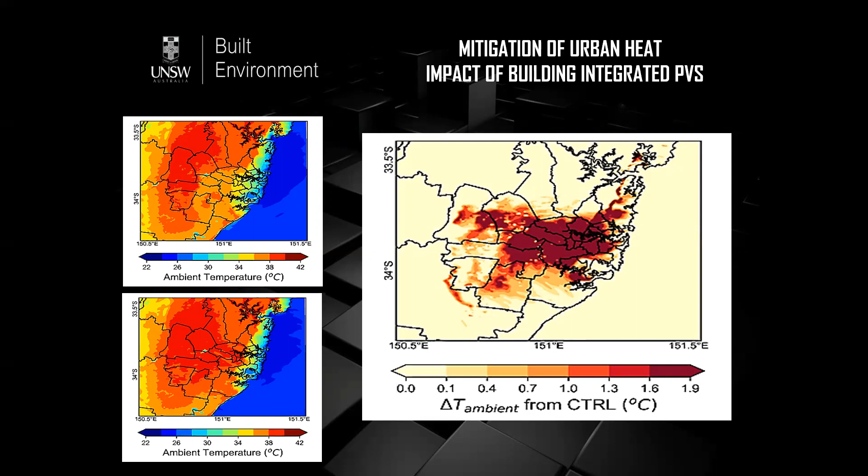What about the use of cool roofs and cool materials on PVs? We have seen that using cool roofs on PVs may increase their efficiency. But we also have to consider that PVs contribute to heating the urban environment, increasing the urban and ambient temperature. These are results of a simulation we performed for Sydney together with the University of Calcutta, showing that increasing the concentration or installation of PVs in the city may increase the temperature up to 1.5 degrees. So the use of PVs in our cities has to be considered carefully.

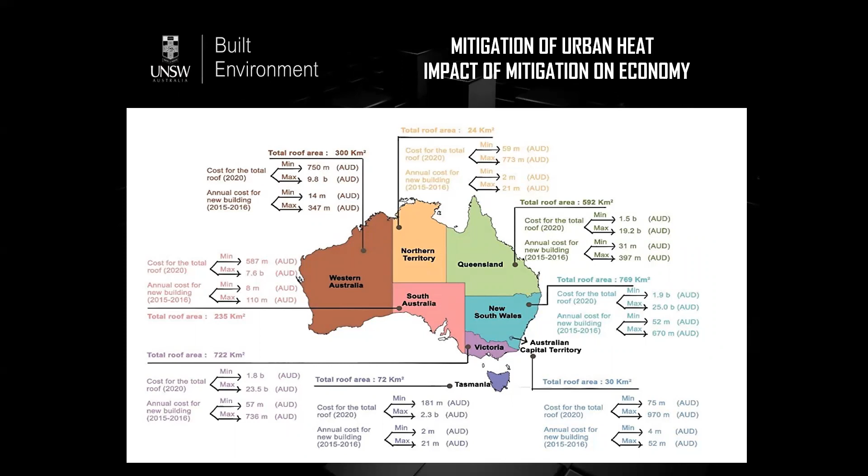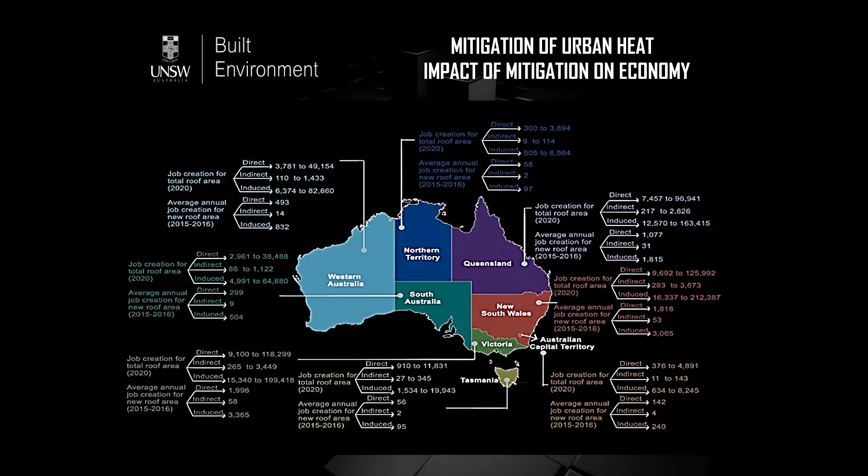What about the economic benefits of cool roofs? We have calculated the economic benefits. Once cool roofs, cool materials, and mitigation strategies are used in Australia, the benefits may be many billions for the whole country for different reasons, and at the same time we may create millions of new jobs. I don't want to go through all these numbers - you can download all this information. So it's a win-win: we may create jobs and have a lot of positive impact.

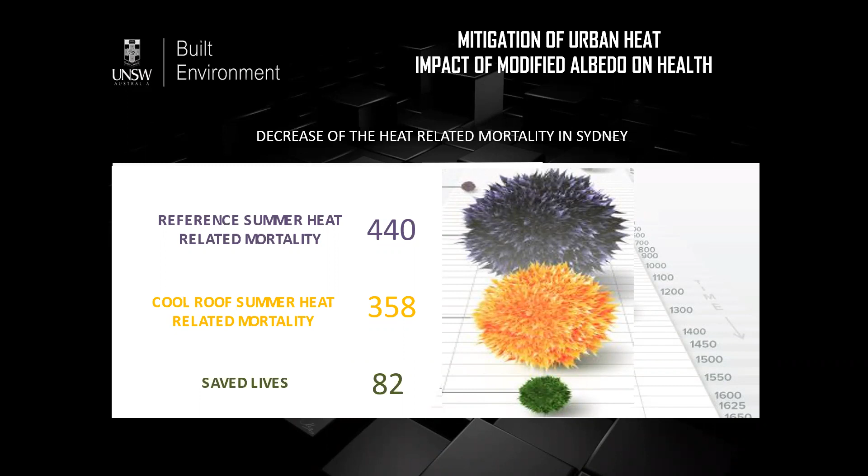What about the impact of mitigation on health? Many studies show that by increasing the albedo of cities, we may decrease heat-related mortality up to 1.8% per 0.1 increase of albedo. Studies we performed in Sydney show that while summer heat-related mortality is 440 per 100,000 people during summer, the application of cool roofs may save up to 82 lives per year because of the lower temperature.

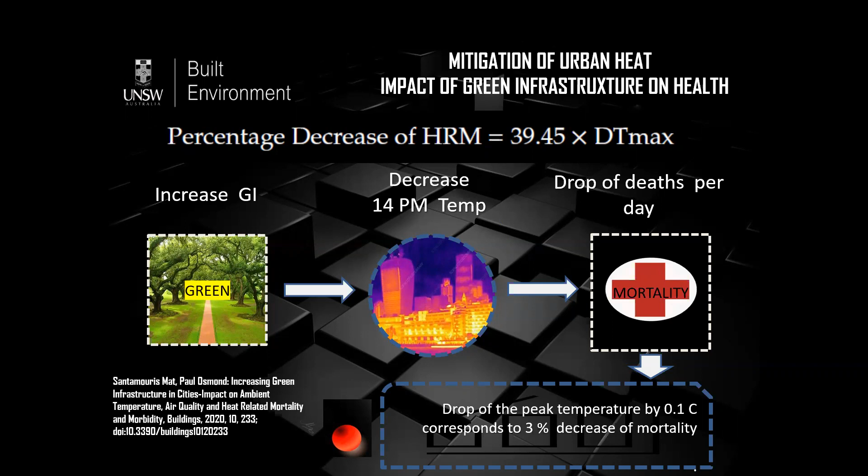The same happens with the use of greenery. Several studies have shown it's possible to decrease heat-related mortality up to 3% once we decrease temperature by 0.1 degree. So to conclude, we have a serious problem.

Our cities are up to 6 or 10 degrees of higher temperature. This has a tremendous impact on energy consumption, up to 100% higher energy consumption, a very high impact on heat-related mortality up to 300%, and a very high increase of the peak electricity demand. This is the actual situation, and the future.

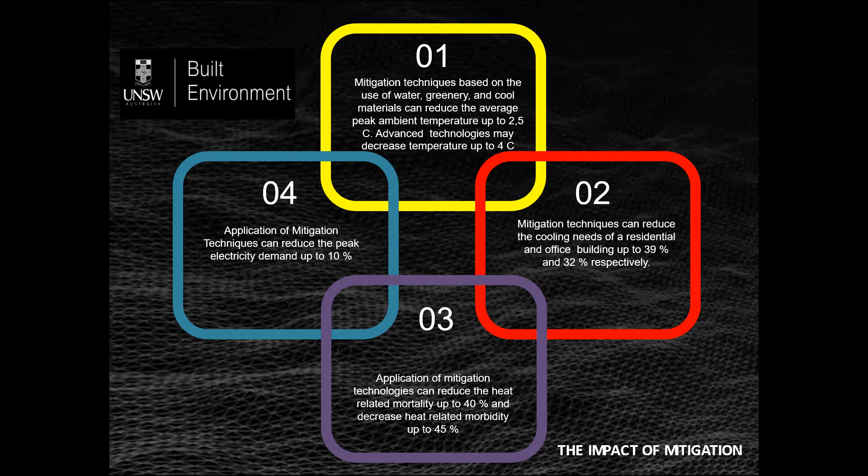We are now able to decrease the temperature of our cities up to 2.5 degrees. We have more than 200 projects, and we are confident that in the near future we may decrease the temperature up to 4 degrees, decrease energy consumption up to 50-60%, decrease heat-related mortality up to 40%, and decrease peak electricity demand up to 10%.

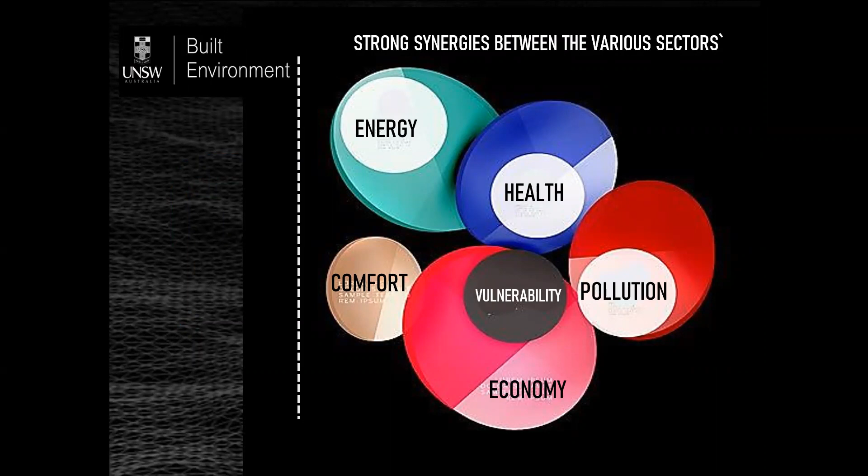But to achieve that, we have to work in a synergetic way. We cannot continue to work, each of us, on a separate discipline - energy experts doing energy studies, health and epidemiology experts doing their research, pollution experts doing their research. We have to integrate. We need to work synergistically, and to really mitigate our cities we have to integrate all the different disciplines dealing with energy demand, energy generation, health, pollution, vulnerability, and economy together in a holistic and integrated way.